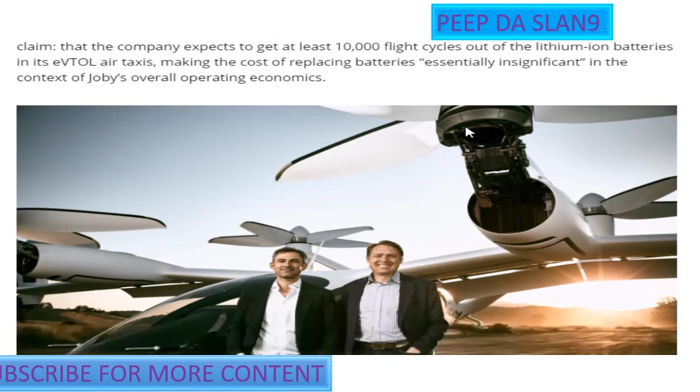According to Bevirt, maximizing cycle life is important to the company not only from an economic standpoint, since Joby plans to operate as well as manufacture its aircraft, but also from an environmental one. We've done a lot of work on the overall aircraft design, the size of our propellers, which drives our disc loading, which drives our hover power requirement, which drives our battery life.

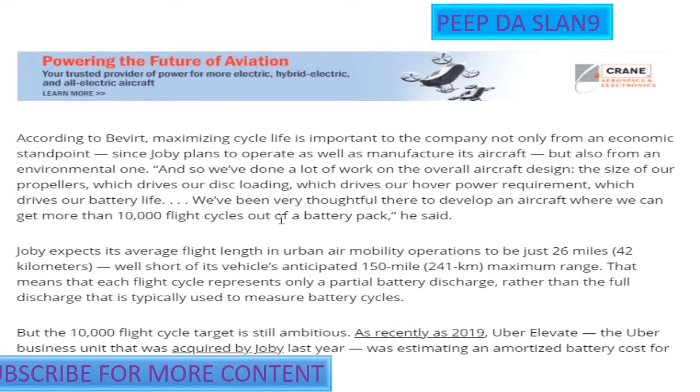We've been very thoughtful to develop an aircraft where we can get more than 10,000 flight cycles out of a battery pack, he said.

Joby expects its average flight length in urban air mobility operations to be just 26 miles, 42 kilometers, well short of its vehicle's anticipated 150 miles, 241 kilometer maximum range. That means that each flight cycle represents only a partial battery discharge rather than the full discharge that is typically used to measure battery cycles.

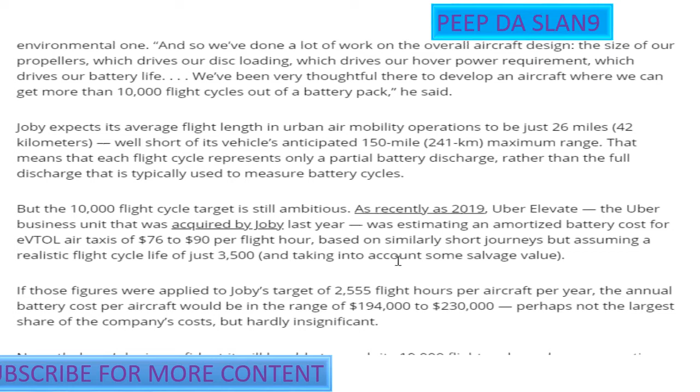But the 10,000 flight cycle target is still ambitious. As recently as 2019, Uber Elevate, the Uber business unit that was acquired by Joby last year, was estimating an amortized battery cost for eVTOL air taxis of $76 to $90 per flight hour, based on similarly short journeys, but assuming a realistic flight cycle of just

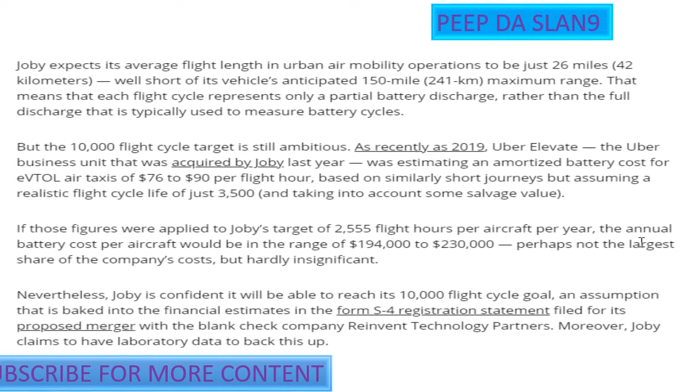3,500 and taking into account some salvage value. If those figures were applied to Joby's target of 2,555 flight hours per aircraft per year, the annual battery cost per aircraft would be in the range of 194,000 to 230,000, perhaps not the largest share of the company's cost, but hardly insignificant.

Nevertheless, Joby is confident it will be able to reach its 10,000 flight cycle goal, an assumption that is baked into the financial estimates in the Form S-4 registration statement filed for its proposed merger with the blank check company Reinvent Technology Partners.

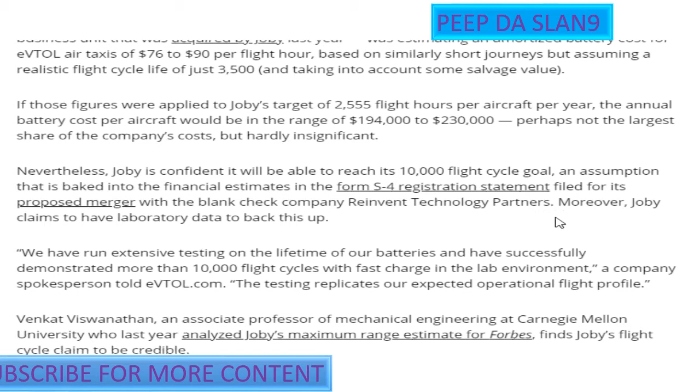Moreover, Joby claims to have laboratory data to back this up. We have run extensive testing on the lifetime of our batteries and have successfully demonstrated more than 10,000 flight cycles with fast charge in the lab environment, a company spokesperson told eVTOL.com. The testing replicates our expected operational flight profile.

Venkat Viswanathan, an associate professor of mechanical engineering at Carnegie Mellon University, who last year analyzed Joby's maximum range estimate for Forbes, finds Joby's flight cycle claim to be credible.

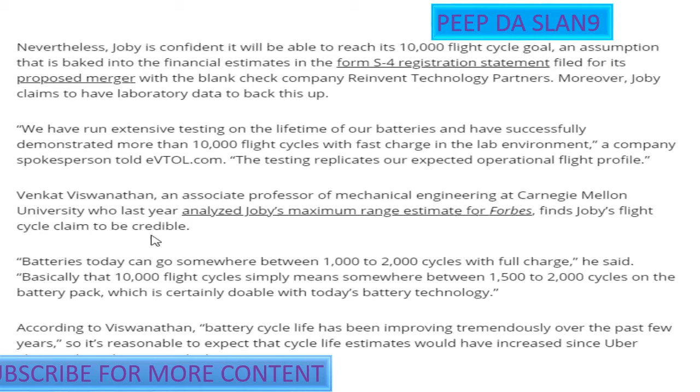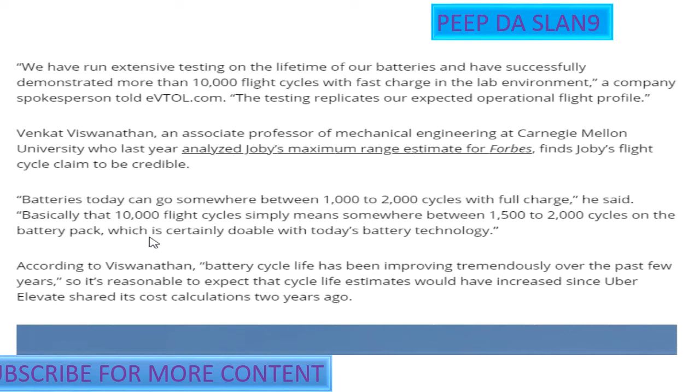Batteries today can go somewhere between 1,000 to 2,000 cycles with full charge, he said. Basically, that 10,000 flight cycles simply means somewhere between 1,500 to 2,000 cycles on the battery pack, which is certainly doable with today's battery technology.

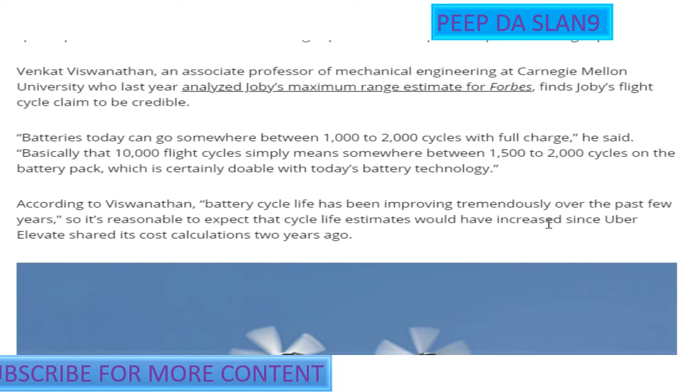According to Viswanathan, battery cycle life has been improving tremendously over the past few years, so it's reasonable to expect that cycle life estimates would have increased since Uber Elevate shared its cost calculation two years ago.

Joby has performed just over 1,000 test flights across its various eVTOL prototypes, so it still has a long way to go to demonstrate a 10,000 flight cycle battery in the real world.

Electric Power Systems (EPS), a leading provider of lithium-ion battery solutions for electric aviation, said that a variety of factors will determine the actual life of a battery in operational service.

Batteries are capable of over 10,000 cycles under certain conditions, but this is only one data point that does not present a complete picture of the problem. The challenge is to accomplish this over time when exposed to a variety of operating conditions, the EPS technical leadership told eVTOL via email.

For example, EPS collaborated with NASA to collect data and model the life of an aviation propulsion battery. We found that exposure to shock, vibration, and especially high temperature can have far more impact on battery life than cycling. Aircraft usage spectrums vary among other things in range and speeds flown. Longer range and higher speed flights affect depth of discharge (DOD), which affects battery life as well.

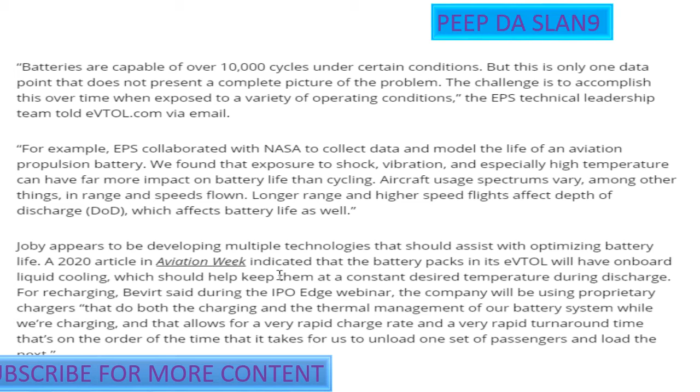Joby appears to be developing multiple technologies that should assist with optimizing battery life. A 2020 article in Aviation Week indicated that the battery pack in its eVTOL will have onboard liquid cooling, which should help keep them at a constant desired temperature during discharge.

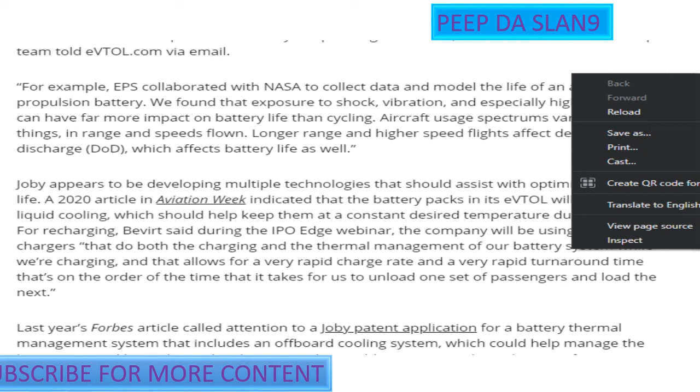For recharging, Bevirt said during the IPO Edge webinar, the company will be using proprietary chargers that do both the charging and the thermal management of our battery system while we're charging. And a very rapid charge rate and a very rapid turnaround time that's on the order of the time that it takes for us to unload one set of passengers and load the next.

Last year, a Forbes article called attention to Joby's patent application for a battery thermal management system that includes an off-board cooling system, which could help manage the heat generated by such rapid recharging without adding extra weight to the aircraft.

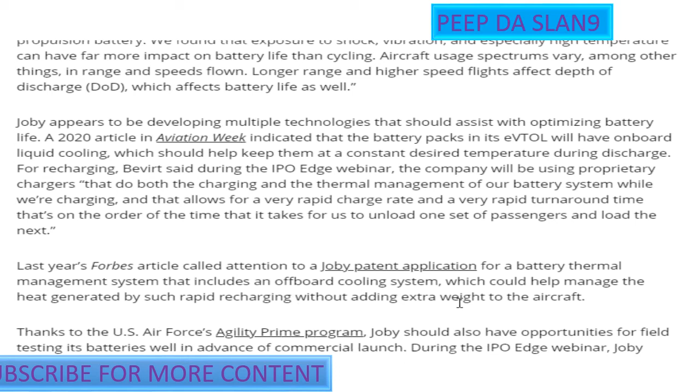Thanks to the U.S. Air Force Agility Prime program, Joby should also have opportunities for field testing its battery well in advance of commercial launch. During the IPO Edge webinar, Joby Executive Chairman Paul Sciarra said that the company last year finalized a Small Business Innovation Research (SBIR) Phase 2 Plus contract that gives the company an opportunity to put two vehicles into service with the Department of Defense this year, eight vehicles in 2022, and as many as 10 to 30 in 2023 under a Phase 3 extension of the contract.

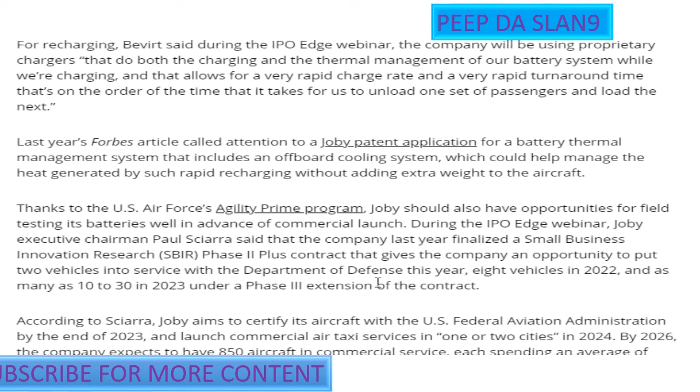According to Sciarra, Joby aims to certify its aircraft with the U.S. Federal Aviation Administration by the end of 2023 and launch commercial air taxi services in one or two cities in 2024. By 2026, the company expects to have 850 aircraft in commercial service, each spending an average of 7 hours in flight per day. By then, it should be abundantly clear whether Joby is hitting or missing its battery cycle life targets and the profit estimates that are partially based on them.

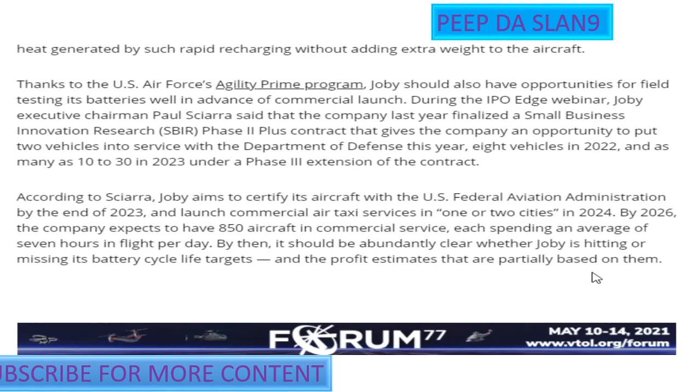Joby, I messed with Joby. Got some stocks in that, so I had to hit that up.